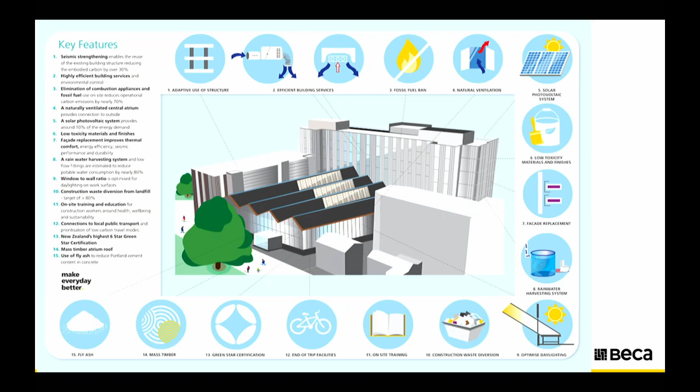So I really like the structural aspect of the sustainability story, but there's a whole lot of other things that are shown on that slide. Hopefully you can read those, but things like high performance facades and rainwater capture, PV cells and things like that. So yeah, maybe we won't go into all of those, but it's just a brief snapshot. Yep.

I'll just give you a quick overview of the structural scope by marking this up. So Symonds Street, where you walked in from, is there. What's getting built is this new atrium - that's what you saw in that render. There's a bunch of steel plant rooms and 1.5 new floors for HVAC and all that other stuff, same thing on top of this tower, just there. Another great addition is some lifts and stairs to make circulation a whole lot easier. And what's not really easy to see here, but did take a bit of work and should be appreciated, is all the facade panels coming off and new facades coming on, which is the first thing you see when you're greeted by the building.

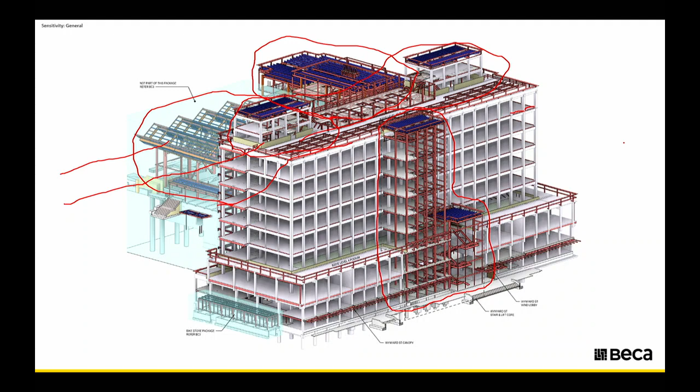I'll briefly explain the lateral system so that you know what's going on. So level 8 is shown here, and the north tower each way is moment resisting frames - fairly simple. Same thing with this one here, east tower, moment resisting frames both directions. Up above is steel portal frames and cross bracing for the new stuff.

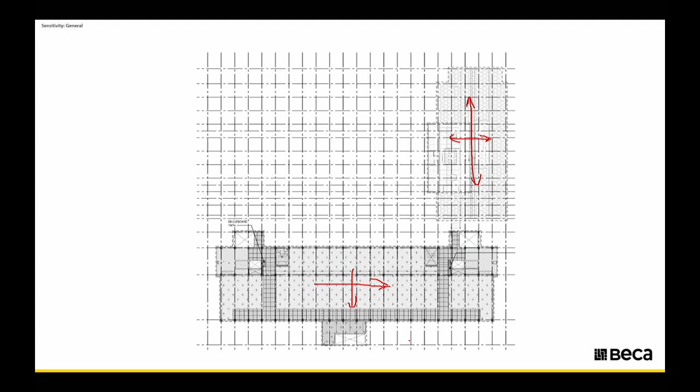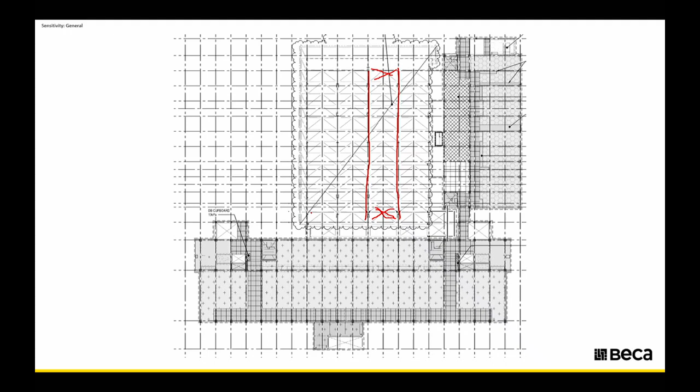Level 6, much the same for the towers, but the atrium - that's where the atrium roof is. You have portal frames in this direction made up of steel box beams, large box beams, and large CHS columns, and in the other direction you have some cross bracing. So that's reasonably straightforward, but the roof gets interesting - you'll see that coming up later on.

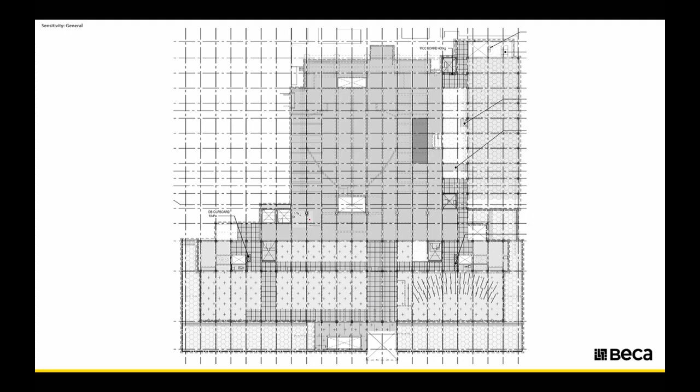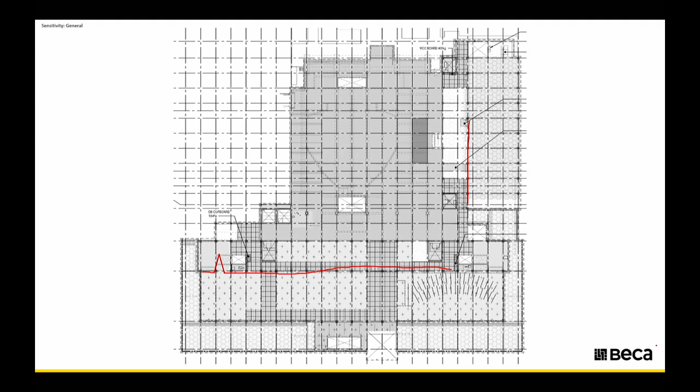Level 4 is the common floor between all the buildings - that's a podium floor, so they all share the movements and forces across there, and you'll see later there's a bit of strengthening happening in there. Below each column is typically a pile and some ground beams framing into it, and generally below level 4 it's mostly concrete shear walls in various locations with some moment frames in some places. Gravity system is pretty straightforward - in situ RC slabs, beams and columns, and the new stuff is generally ComFlor slabs with steel beams under to keep the weight down.

I might just pipe in with a few lessons learned as we go through. One thing with older buildings - they really have optimised the rebar for the occupancies in that situation, so you need to be quite careful that your loading is going to be the same. Also there's a few instances where we found identical beams but with different rebar, so we suspect there might have been a mistake in the original thing, but maybe don't assume that one beam is typical for other situations. So yeah, a few things that we picked up. Yeah, it does vary, doesn't it?

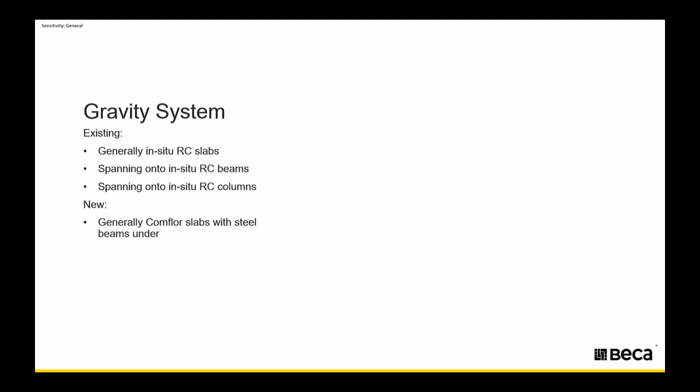I guess a few other things to talk about - the PC panels, obviously they're quite heavy. The other thing was that they had slotted connections that weren't quite sufficient to allow movement for our expected interstory drift, so these actually also happen to be one of our critical weaknesses in the building. So I guess the gears started to engage that perhaps there's an opportunity to do something a little bit more drastic with this building. Basically where we ended up was by taking these panels off the building, we firstly would deal with that durability issue. It also gives kind of a weight benefit for the building - there's quite a bit of mass there that we actually used to offset other things that we've done to the building. Obviously the distribution isn't identical, but it's kind of nice in principle.

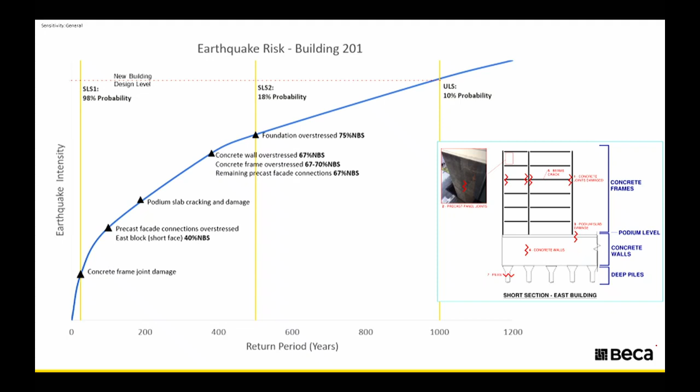All right, so one thing that was immensely helpful during design and then during construction again is all the on-site testing and investigations that people did before I joined in. I can't tell you the number of times I've re-looked up the concrete strengths, the rebar strengths, the blockwork edge conditions, and all the stuff that was obscured. It really cuts down the amount of assumptions you have to make.

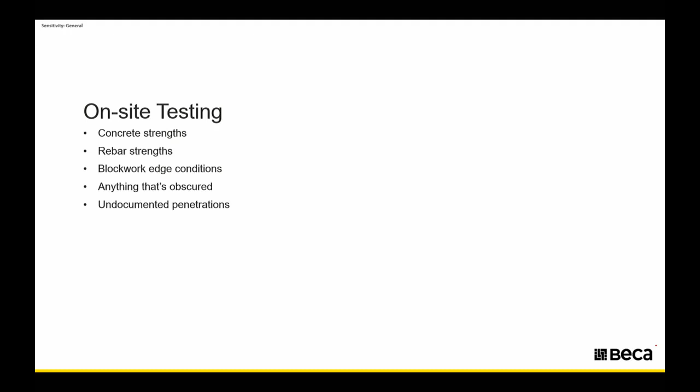And one thing that might be unexpected, but not unexpected once you think about it, is all the undocumented penetrations through shear walls that just naturally occur through the life of the building - lovely services engineers. There were a lot of things we had to make a judgment call on. For example, we couldn't see the edge of the slab until the panels came off. So there were various uncertainties we had to make a judgment call on, and there were some intrusive investigations we could do in some areas, and others we couldn't because there was asbestos. So whatever you find out is super helpful - and document it.

So in terms of design, this is level 4 that you see here. After all that analysis, we had to figure out what to strengthen and where. Is there a pencil here? There we go. So because we've taken out a chunk of structure here for the new circulation node, we've replaced some of that capacity with a new tie across there on this podium level, because there's quite a bit of earthquake going up and down the page.

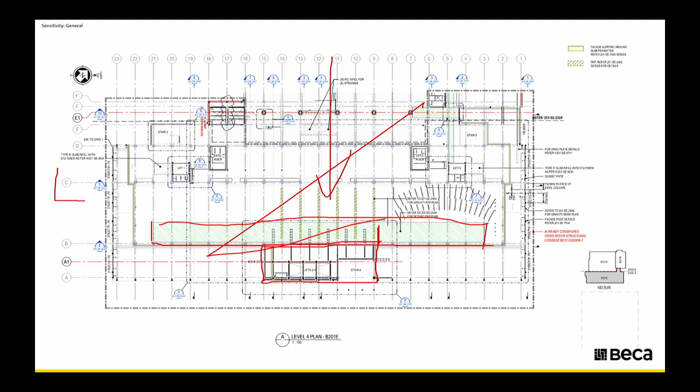This next slide, I'll just go through some of the details I found interesting. Next slide is on this grid C shear wall, where we adopted a similar approach to the previous one, where we looked at the analysis output to figure out where the hotspots are. We figured we need some tension capacity here. And also intuitively, you'd think about putting a tie across this level, because you have a number of short columns.

Sorry, this thing's jumping around.

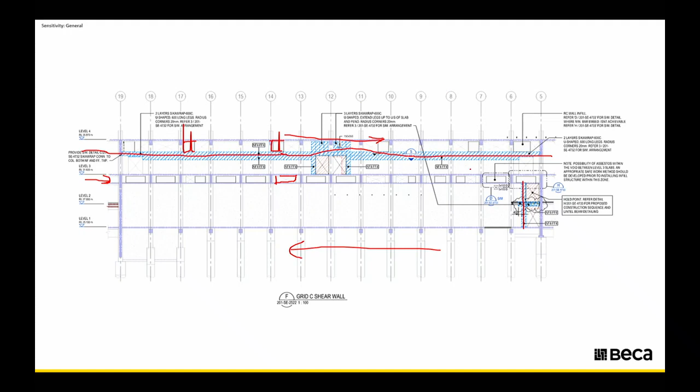Short columns and short walls need to transfer all that podium level loading down into the foundations. You're actually getting hit with that twice, because there's a whole lot of holes here as well, and no guarantee you'll actually infill all of those. As an example, these ones on this level are actually kind of difficult to access, so you sort of get what you get and do your best with that. CFRP really came in handy here to spread the loads across the wall.

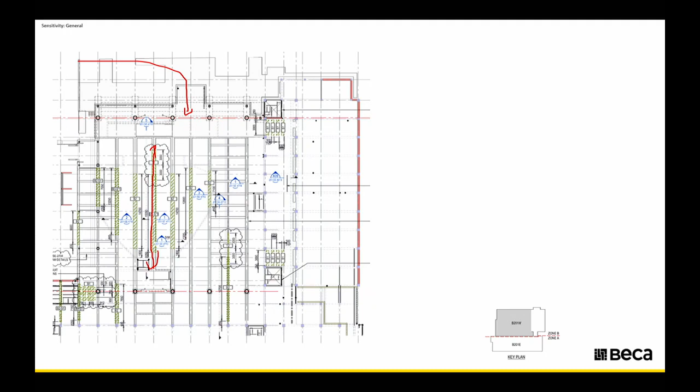Another bit of design: on the level 4 slab where you come in from the street, it's actually a big open space, and underneath it is another big open space, which means rather large spans for these concrete beams. The concept there, you don't need to read all of that, but basically it's to make the beam section a little bit taller by taking advantage of the new slab on top. That helps your negative capacity, and it helps your positive capacity a little bit. In addition, there's also some CFRP on the sides for positive bending as well.

The interesting one here is the decision you make as an engineer. Do you say that this rebar you're drilling and epoxying in, do you use rebar theory, which says you need to drill this deep, or do you use anchor theory, which says this deep, or do you use lap splice theory, which means you have to drill that deep? Interesting debates about that one. I think we got it right in the end.

I'm happy to walk on that floor. That floor's quite an important space for the university, because there's going to be all sorts of functions and stages, hopefully not O-week parties or something like that. But yeah, there's going to be certainly quite a big load, and obviously this new slab we're putting on over the top is a bit of dead weight as well. We've mitigated some of that - you don't have to build up the whole thickness. You can actually get away with some polystyrene infill as well, which is a great weight-saving measure.

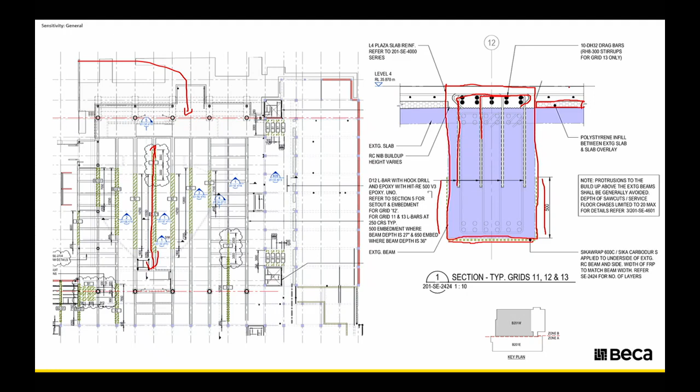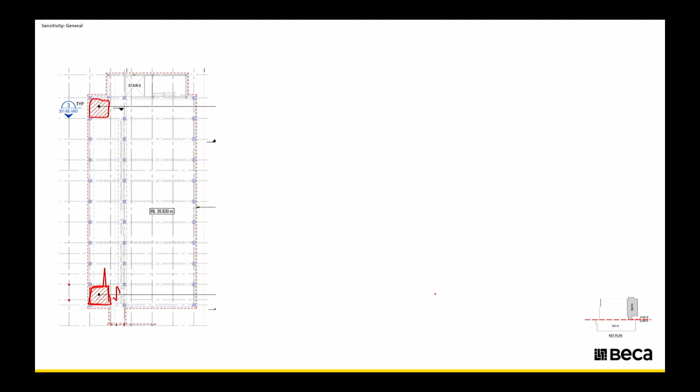This is an example of something that looks like a simple change during design, but it actually has some downstream structural effects you've got to think about. This is a floor plate on a bunch of levels in the North Tower, and essentially what's happening here is the floor is getting cut out for some new risers. On first glance, you might think, well, cool, this thing is spanning this way, so I'll just cut that out, who cares, job's done. But not quite, because when you do that - and this is our solution here - you actually lose a bit of backspan. If you think about the bending moments across this red line here, you have a number of continuous spans, and then the last one has more positive bending because it's an end span.

So because this was designed when people optimized things a bit more than today, you would have had more positive rebar here. Once you cut this span off, this becomes the end span, so you need more positive reo than this thing here would have had. Hence the CFRP solution there. Yeah, there's a few little fish hooks with some of the curtailment - the existing RC was a bit short of what we'd expect as well. So when you look at your capacity diagram, there's little gaps, and you've got to make sure you can bridge that gap. That was a little trap - an interesting one.

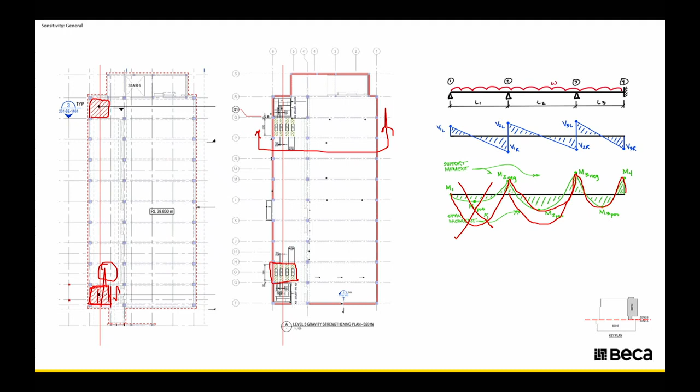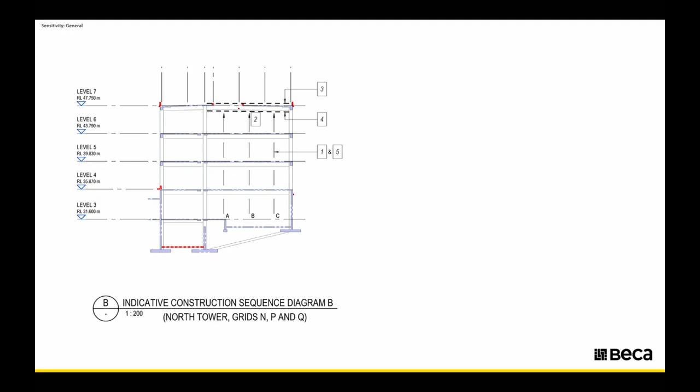The other one in the same tower, this cross-section here at grid P - because this is a roof beam that used to be a concrete roof, but now becomes an occupied roof, it has higher live loads that you've got to take care of. This needed strengthening, and the way checks and design work when you add CFRP, which is what we initially thought we wanted to do - that's what we designed here. So CFRP here, and that nib detail you saw before.

Sounds great. We've asked for some propping, because one of the checks for CFRP is the existing rebar can only go to some stress level. If it goes above that, the ACI guidance doesn't like it. So there has to be some backup resiliency under SLS loads - that's one of the criteria. So the request on the drawings was to please prop this thing, and you can see how intrusive this is, because at least the way we drew it, it's going all the way down. They probably could have done it with just one floor.

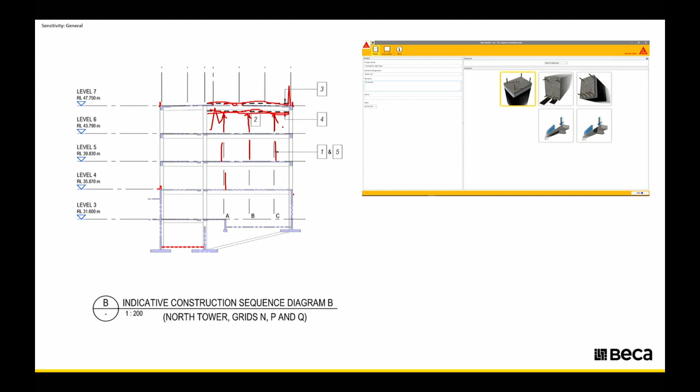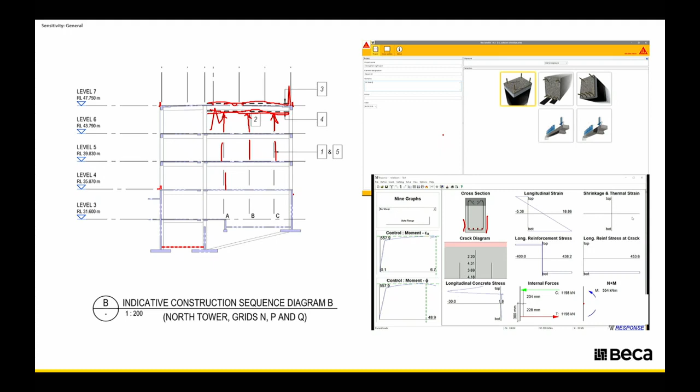Either way, during construction, the request was to see if we can skip that part, and we happily obliged. Because when you design this sort of thing with CFRP, you've got to think about the dead loads that are already on there, and only then you're gluing the CFRP, so it doesn't get engaged until later, unless you prop it. So the solution here was to use a different software that lets you check the locked-in stresses, and in the end we went with some steel plates on the side of the beam that were tolerant to that sort of thing.

This here is a thank you note to all the previous designers, but before I got involved in CM. They've seemed to lay out the calculations really well, which made it very easy for me to answer RFIs. So next time you're designing, I'm hoping that you're documenting it as well as you can, listing out the assumptions, the load paths, and all the utilization ratios, because RFIs are coming in quickly and people want quick answers whether they can or can't do things.

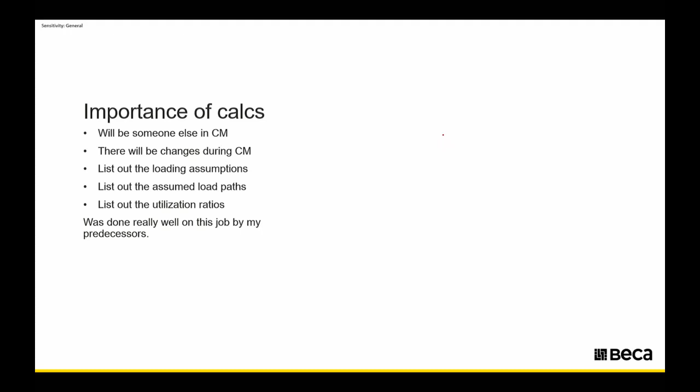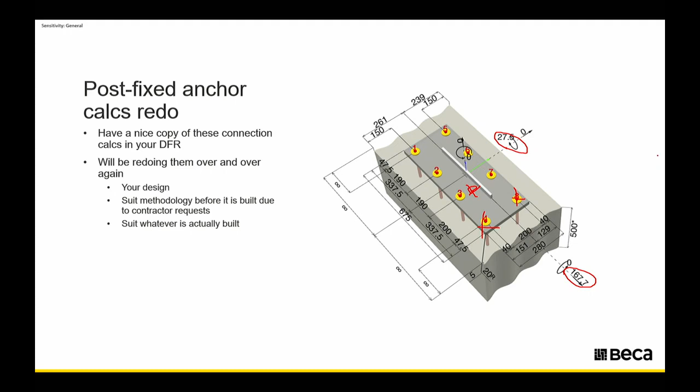So one thing that keeps getting redone during construction is all these drill and epoxy and mechanical anchor details. If you have a nice copy of your calcs that say what the eccentricities and what the loads are, it makes your life easier, because you'll design this thing a few times. You'll design it when you design it, then there'll be an RFI saying, oh, can we skip these and put them somewhere else? You'll redesign it by looking at the assumptions and calcs again, and then the thing that's built is different still, so you have to calculate that once again. If it's documented well, it's a much smoother process.

This is one of the more complicated connections in the atrium. So we've got those box beams that span a fair distance, and they land on these CHSs. You can see a bit of the cross bracing going in the other direction. So this is a very important knee joint for moment transfer.

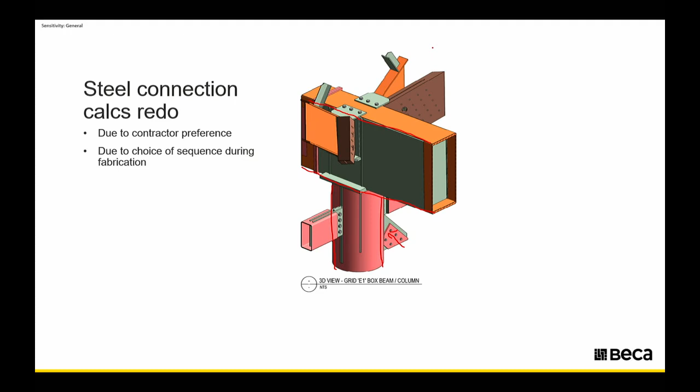And what happened there was a sequencing request from the builder or from the fabricator, because they've asked if they could just do this green part, because that makes it a whole lot easier for them, and this blue part. And I was at first stunned with how do I even answer this, because now I'm missing this bit and this bit of full strength butt welds. That doesn't sound like it's capacity I want to lose.

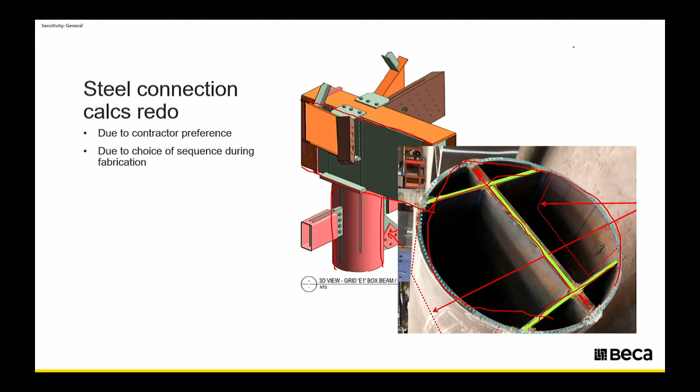But as it turns out, by going through previous documentation, it explained it really well, and chatting internally, of course. Obviously, the complexity here is changing from a square shape into a circular shape, for a moment joint, and trying to make sure that force is going to behave itself. So yeah, interesting challenge, interesting point they raised when we saw it.

This one was plenty of fun for me. So in the atrium, the roof is like a crinkle shape. So you get a whole lot of rafters coming in this way, then going out this way, then going down this way, and there's a whole lot of moment that is there in the static case and also in the earthquake case as the thing acts as a diaphragm.

And what's hard to appreciate is, so there's a very simple request from the architect. Can we please have this thing vertical? Which sounds fair enough. And all they're doing is they're trying to hide all the steel and all the timber, because you don't want to be able to see any of the steel behind any of the facings. So these things here are purely glulam, and these bits of steel have glulam around them.

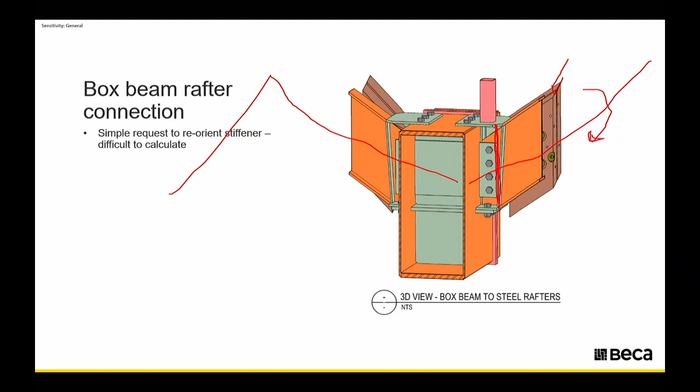This is pretty hard to do from first principles, and even if I had the loads, I did have the loads, and I still struggled to figure out how's this possible to fulfill this request. And what came to the rescue was a finite element model that someone had helpfully done before me, and I was able to just tweak the things until that was sorted out, and it told me the answers I wanted.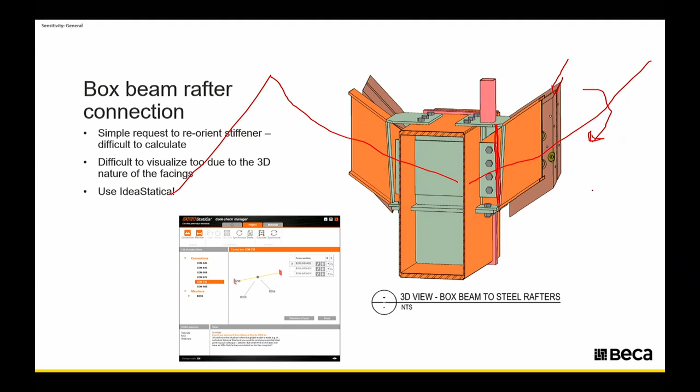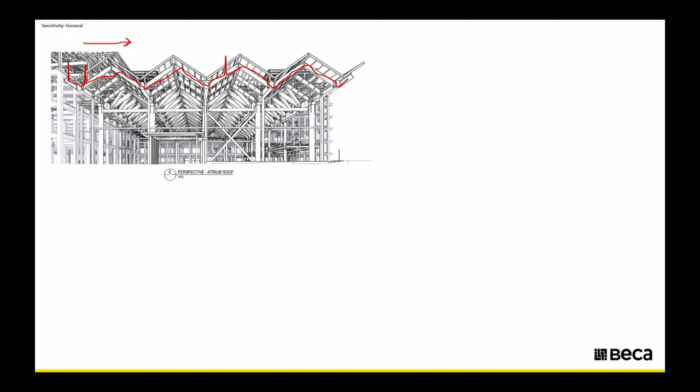So some of these bits in the roof are steel. There's maybe less than 10%, maybe six of them, sort of at quarter points, on the big box beams. It's not a particularly efficient structural shape.

The whole thing's trying to spread like this under gravity, but with seismic or lateral loads, this all tries to kind of distort. So we were having real issues with timber connections trying to take this sort of moment, particularly through the apexes and things.

So we decided pretty early on to introduce some sort of transverse steel portal frames, just to stiffen it up and make sure that we're not trying to do too much with the timber connections, because that's potentially a bit of a rabbit hole.

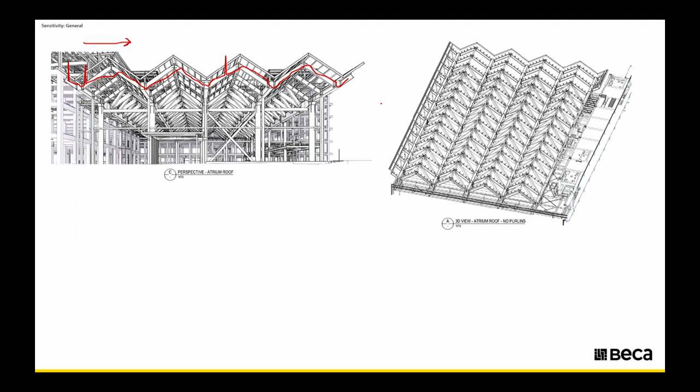So the design of the glulams is not particularly a big drama. It's just bending, shear, and all the other stuff that you know and love. But the end connections take a bit of thinking. There's multiple different things - first of all, the geometry is interesting.

If you look at it in 3 dimensions, you've got miter cuts on different axes, and you've got router cuts also on different axes. So it's pretty hard to visualize in your head.

Not shown here, but there was another example where I think one of these dowels, maybe this one here, was actually quite close to the miter cut, and you don't appreciate it on the 2D that's on the left here. You end up with an edge distance that's quite close. Again, hard to predict when it's this level of angles.

But this is a standard connection across the whole roof, so you want to make sure you get it right. And I'll show you what we did.

So during construction, a mock-up was made, which was immensely helpful, which was part of the box beam. See on there? The beam itself has got facings on it, and then - not attached in this case when I was there - these are the flitch plates that go into the glulam members.

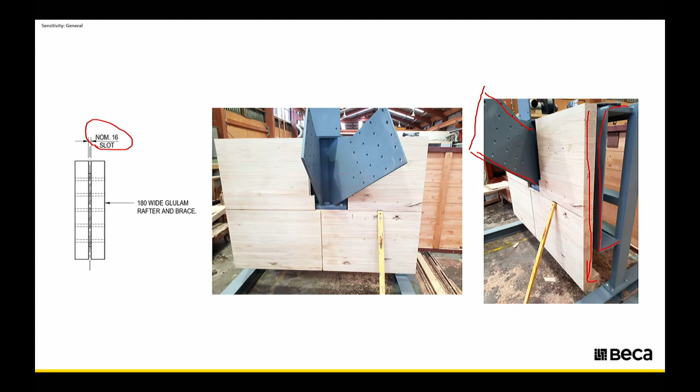So when designing this timber connection, there's a few things that are kind of interesting. One is there's a number of competing failure modes in there. Some of them are more ductile than others, and you want, in some ways, a hierarchy between them in some cases. But there's also some judgment calls you make based on literature you read, and how much you believe it's going to be a problem for this particular connection that you're designing.

So, for example, these big bolts with the washers, that's so that the two bits of timber don't spread apart, because the dowels aren't doing that. The other judgment call is whether you put in reinforcement screws this way or not. Again, the dowels do induce some sort of moment in that connection, so you have to think about that.

And the other clever thing, I don't know if I'm giving away IP here, but these holes are slotted in this direction to reduce the moment in the dowels and that end connection region, because even though we'd love for this to be a pin, it still attracts some bending inside it.

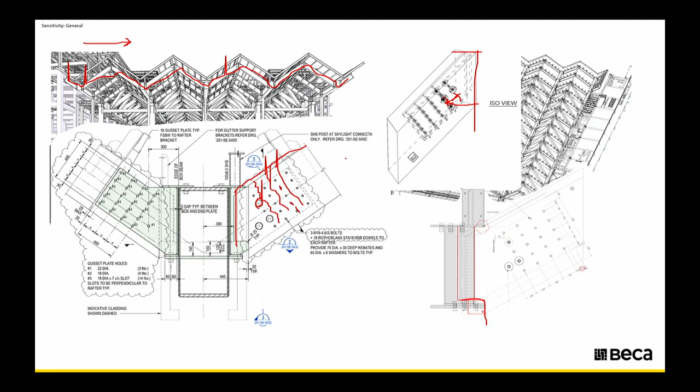I guess the other part to that is just shrinkage in this timber and recognising it's not a geometrically stable thing. So you just need to think about how that change might impact your detailing as well. This is not my work, just presenting it.

One of our colleagues did a very good job on the staging and sequencing of the box beam, how it's propped. There was even a whole lot of modelling in Strand7 to figure out what the locked-in stresses are going to be, and the sequence here explains how you piece it together to minimise the locked-in stresses, particularly in the glulams and the timber, because the less in there, the better.

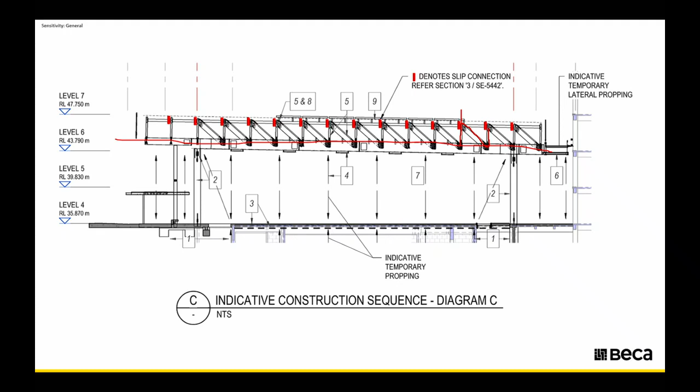And there's some interesting effects on this thing, because you can see from the side view, it kind of wants to take some gravity as well off the box beam. So the box beam, you want to take the gravity because that's steel. But the whole thing is also a giant truss. So to that end, there's some slip connections at each apex, which is essentially just some shim plates in between these two, so that when the whole thing sags down, you can pack it out with whatever's left over with plates, is the idea.

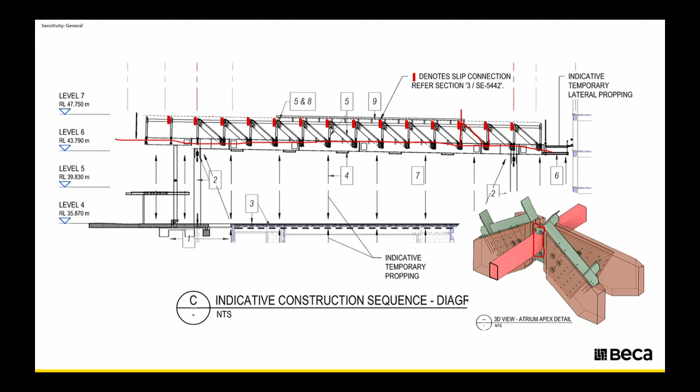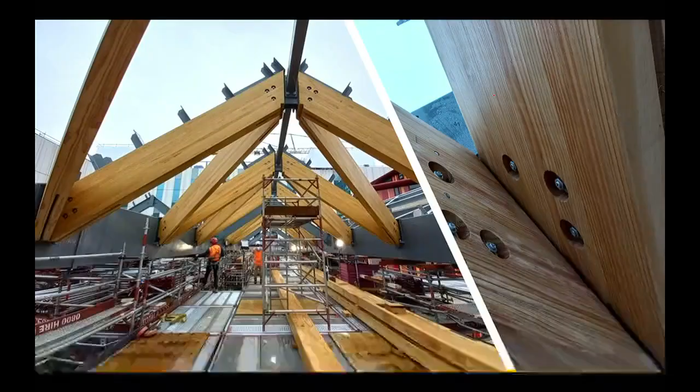So yeah, again, some more images of the current progress. So yeah, really happy how these modules are coming in. You might have noticed from the detail that Dimitri showed, these are basically just a bearing connection. So the whole module comes in and just loads straight down on top of the box beam, and then the bolts are torqued up. So it has been going in really quickly, and we put a lot of thought into making sure that was going to be the case.

And this on the right-hand side here just shows how complex that really acute angle is in reality, but it also shows how cool that's going to look. I think when you walk into the space, it's going to be a really quite awesome experience. So really looking forward to having that.

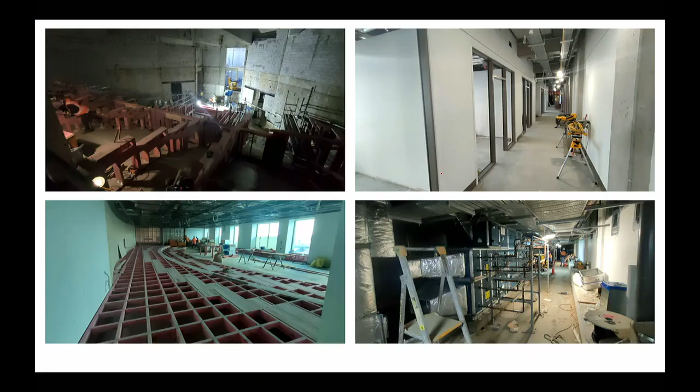And maybe just a couple of quick shots from current state on the inside. So this is the large HSB lecture theatre, so that's underneath the atrium there. So these are the big beams that we're strengthening, and the new lecture theatre, which will be constructed out of CLT bleachers. And just a bit of fit out going on with exposed surfaces, so all coordinated to a pretty high level in the design phase, and large format teaching, so building up lightweight floors on top of the existing concrete.

And another little aspect, I guess, just to bear in mind, using these old buildings and putting in new HVAC and services. The plant rooms are really tight. They're not designed for the sort of level of comfort that we expect these days. Maybe we're getting soft, but the plant rooms are really congested, and it's just something to bear in mind when you're trying to fit secondary steel in to support plant and that sort of thing.

All right, is this you, Dimitri? Oh yes. This is a type of connection that seemed to have worked well after some requests from... Was this an ECI? Yeah, so maybe I can talk about this one.

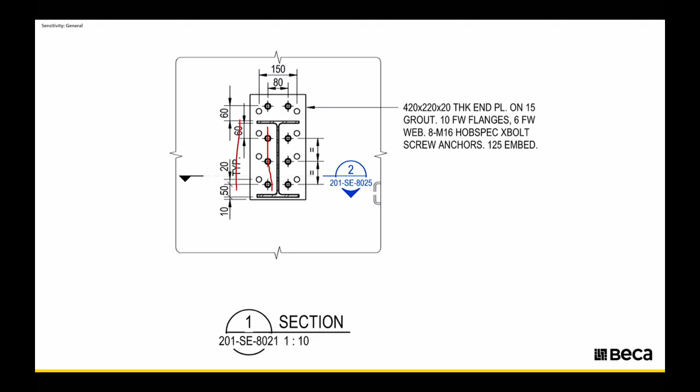Yep. So basically, we did have some ECI input from the contractor, and one thing that we were very mindful of right from the very start is, okay, we're going to be drilling into some existing concrete, and we're going to hit some rebar. What are we going to do in that case? So the idea was that we basically oversize the base plates and provide multiple extra holes that they can choose as an alternative. So the theory being that if you hit a bar here, then hopefully you've got a gap here, and vice versa in this direction.

If you hit here, you can miss here. So all good in theory, and it did work pretty well in most cases, particularly when we were able to deliberately offset from the grids. So for the circulation node, for example, we were connecting with these big new structural elements. We deliberately offset things so we could get our big diaphragm drags through less congested areas,

but it's not always possible. And the other thing, we were relying on the contractor to do a lot of scanning and locating of rebar, and it's a bit hit and miss, no pun intended, but often you pick up one layer of rebar and miss the second, which is a little bit deeper. So yeah, that was one of the challenges on the project, but I think generally it's worked pretty well.

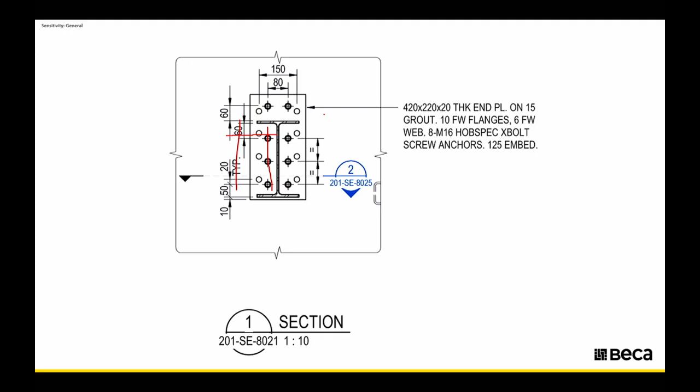Yeah, and I guess just be mindful of trying to protect. I mean, we're effectively custodians of this old building and trying to make sure that the contractor doesn't wreck it. So just keeping a close eye on how they go about things is really important. Mm-hmm. Okay. Yep.

Something that was interesting for me, one of the things that I came across, was services seemed to go where they wanted to. The intent was, there's a floor that has a number of bathrooms, and behind is a services corridor. And initially the idea was for all the pipes to go down through this big giant hole and just disappear. That was the ideal, but in real life, there's other drivers than just structure.

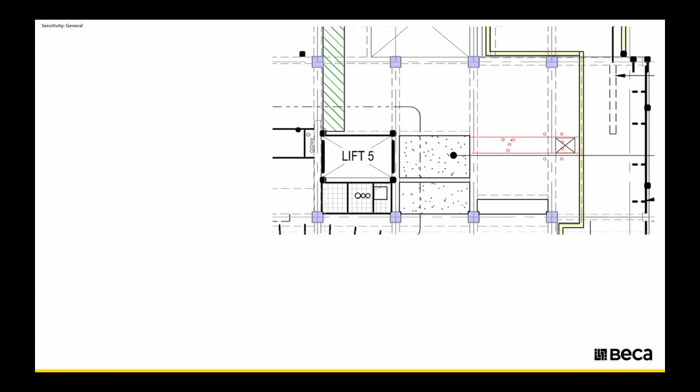So what happened is you go have a look at a drawing. Sorry, I'll erase this stuff. It's confusing. And you actually end up with holes that, this slab is spanning this way, by the way, that interrupt a whole lot of my bars across here. So there's chunks of slab that don't have as much rebar as I would have thought.

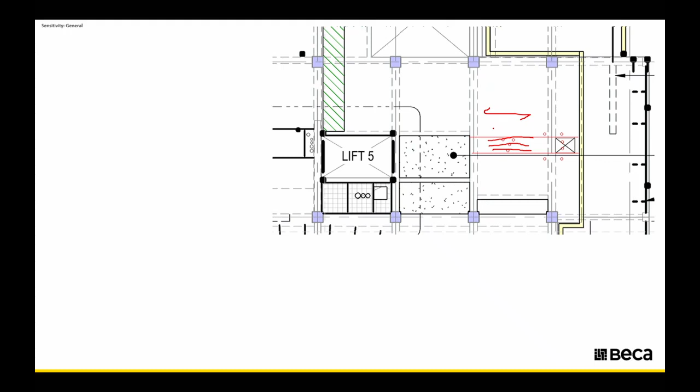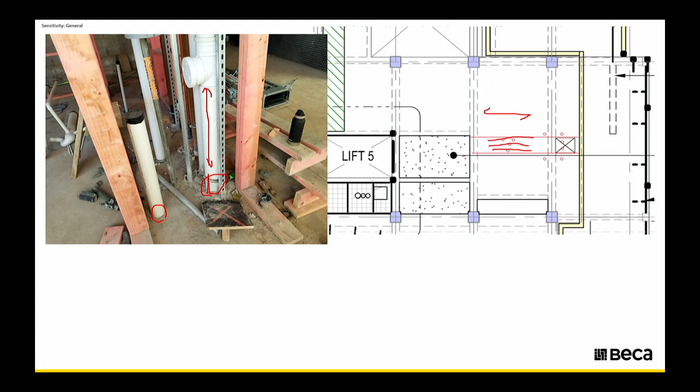And if you think about why that's done from the services and the builder's perspective, it makes a lot more sense. Because rather than going through a hole which is not fire rated, it's easier to go through existing concrete, and then your fire collars and stuff are on here, and that's all separated. And the other thing to appreciate is that this stack of pipe is much easier if it's one big straight line that doesn't do a whole lot of doglegs going down. So asking them to miss rebars on each floor is tough.

So yeah, that was something for me to note. And we've strengthened that a little bit in this particular instance. And in most other cases, it wasn't this congested.

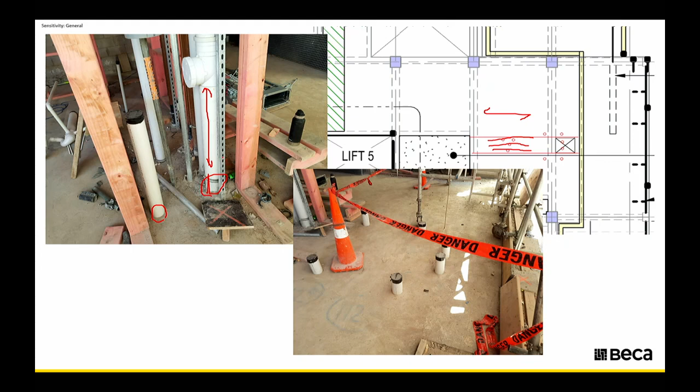And another thing I've learnt is facade seems to be more important than structure. Basically, it's easier to modify existing structure than to order a new facade panel or try to refabricate some piece of facade that has long lead times. So you can see from this one shop drawing, they'll have some dimensions that they can't move on, like that 110 is critical, and, probably not shown here, they'll have clearances they want to be away from your structure. I can't remember why. I think there's some tolerance that's required for their thing to perform properly.

You can see the level of accuracy. It's 604 millimeters, which for an existing building, if this thing is a straight line going up all the stories, the existing building could be a little bit off square, not on a lean, but sort of offset as you go up. And while for the most part this was not an issue, there were instances. So just be ready for RFIs asking you, could you please move the existing structure to make way?

This particular detail looks fairly innocuous, but I think we probably had at least a dozen design meetings on this, just agonising over it with all the different disciplines at play. You've got the fire stopping minimum dimensions. You've got the tolerances for the facade in both the vertical and horizontal direction, and you've got all sorts of things that go into this, and how easy it's going to be to build. How does the facade supplier want to fix to it?

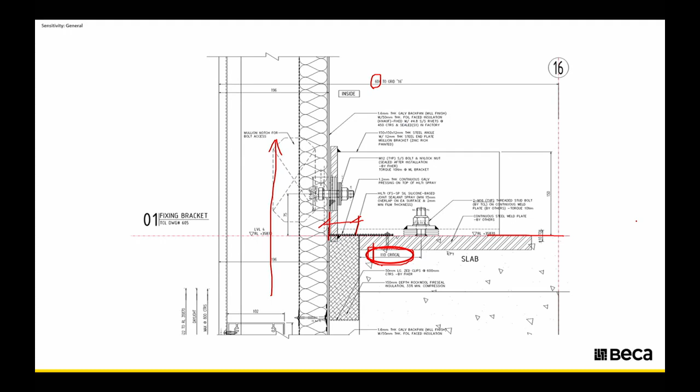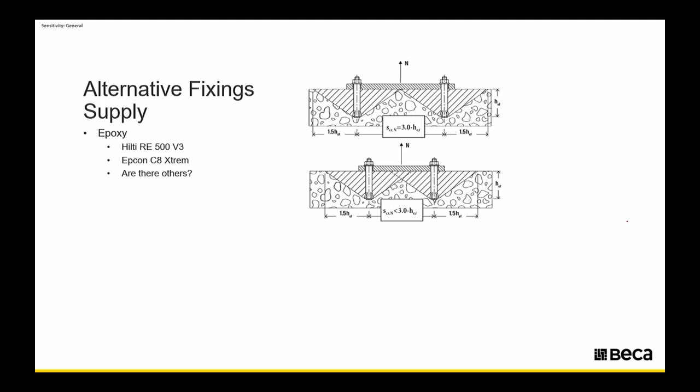So inevitably you'll run into RFIs asking for alternative fixings. You'll specify one brand or one type of fixing, and they'll ask for a different epoxy, either supply issues or just getting the job done quicker. And similarly for mechanical anchors, there was a point in time where there weren't enough M20 HST3s, which caused a shortage of M20 Trubolt Xtrems from Ramset.

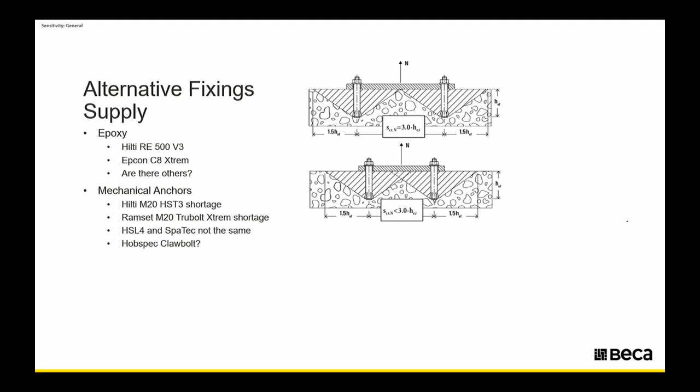And offered up for us was the HSL4 and the SpaTec, which are slightly bigger. They've got the big sleeves around them, and they've got larger spacing requirements and larger edge distance requirements. So I guess, for me, if I'm designing in the future, even if I'm specifying HST3s, I'll probably space them further apart in case I'm asked to use the ones that have the larger spacing differences, just in case it comes up as a question.

I think we're not done with shortages. And you can provide some helpful notes to the contractor so that they can do the research for you on ETAG, EOTA, and all that other stuff. Yeah. I think one thing I didn't mention is the program on this project has really been one of the key drivers for the whole thing. From 2019 to now, it's been pretty fast track.

So we're really trying to keep the contractor going and not getting hung up with containers stuck in the Suez Canal and stuff like that. So very mindful of that sort of thing. Yeah. That's weird. Almost on time.

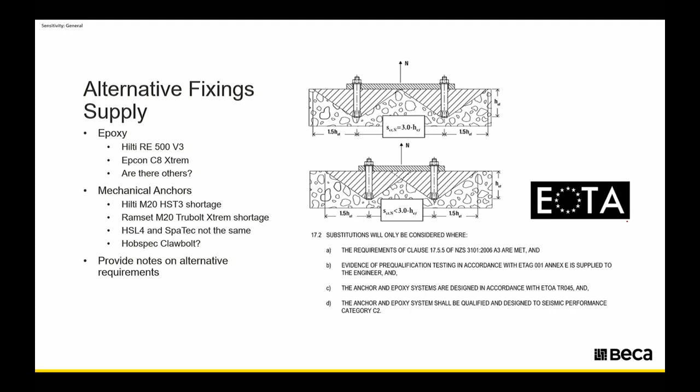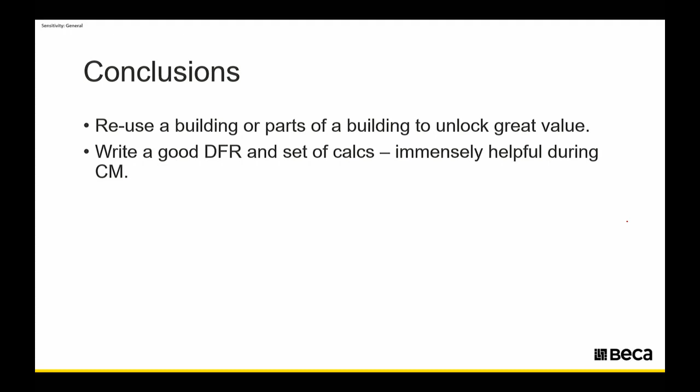So I'll run through a few things that stood out for me while I was on this job. If you reuse a building or parts of a building, I think you're unlocking great value, and you're doing everyone a service because you get most of the structure for free that's already there. I think that's a great thing to do. If you write a good DFR and set of calcs, that's immensely helpful for the next person that's doing the CM. The RFIs get turned around much quicker.

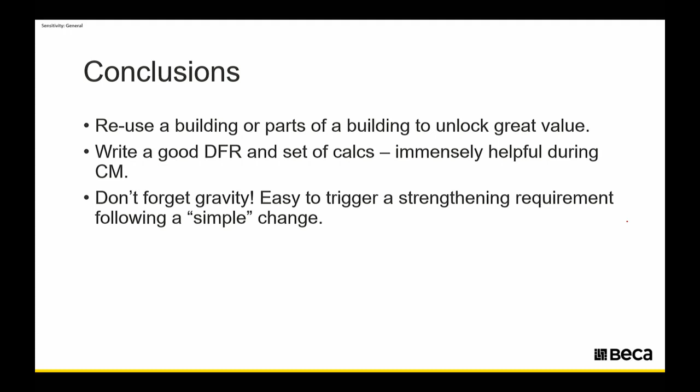Don't forget gravity and all the simple changes that might trigger some sort of strengthening requirements, like we saw in that riser example with the backspans. That applies to beams as well, if you demolish beams. I guess this is your one.

Yeah, with the old drawings of this building, there's so many little nuggets of gold in there. So it's really important to get into those drawings and pore through them and read every little handwritten note that's in there, because there's all sorts of good stuff. And I think one of the key things is taking that with a bit of a grain of salt as well, and applying a judgment lens to it.

There were instances where we suspected that the original designer had missed something, or in fact there were instances where we thought there were piles under a part of a building but they weren't on the drawing. So from a judgment perspective we allowed for that, but they weren't explicitly shown. And I think the other key thing is to really understand how the building's behaving and hone in your intrusive investigations on those key aspects.

So we did things like demolishing a portion of the diaphragm, the shear wall connection, just to get some confidence around the detailing of the starter bars and make sure that they were terminated correctly within the shear wall. All sorts of things—durability tests of the concrete, making sure there's no chloride ingress, carbonation, and things like that.

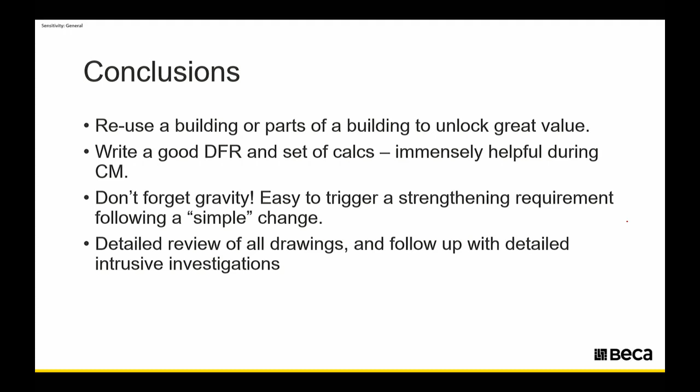Okay, that's pretty silent. I've got a question: when was the original building built? It was 1970, I think. Okay, so kind of probably quite a good decade if you're going to try for adaptive reuse—you might want to think twice if it's in the 80s. But we had reasonable confidence that it was going to be done to a reasonable standard, and hopefully not too many shortcuts. So that's just something to bear in mind.

So in terms of the intrusive testing, what sort of consistency do you see between what's documented on the drawings in terms of material compared to what you see on site, like reinforcing strength and concrete strength? Yeah, there was a bit of variability actually.

Some of the concrete was a bit not as hard as we expected. We've done many projects along this road of similar eras, and some of them were extremely hard concrete, particularly the Ministry of Works ones. This one maybe had a slightly lower batch dosage of Portland cement or something, but it was still good enough for what we needed. It was really good to get that information, just to get some confidence that we were dealing with good bones—particularly the rebar, I think it came out better than what we expected in terms of yield strengths and things like that.